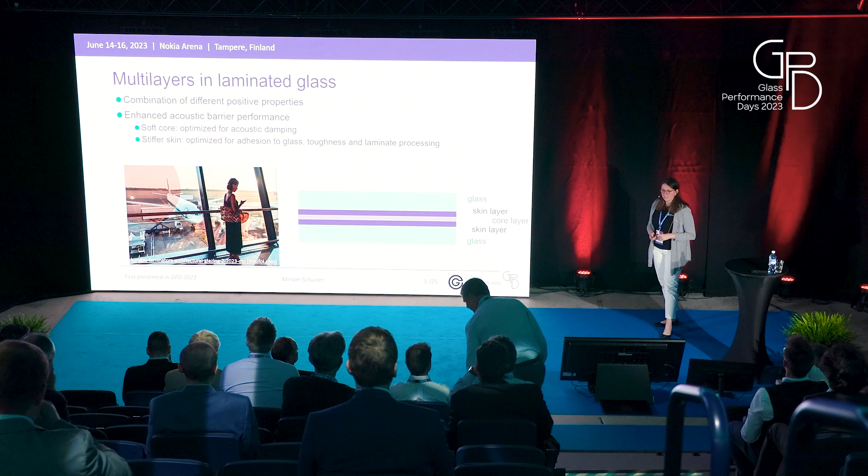So why do we use multilayers? By using different layers or materials as interlayers, we can combine different positive properties. One example in laminated glass in the architectural context is acoustic barrier performance. To have good acoustic performance, we need high damping, which is achieved with very soft interlayers. However, soft interlayers are more complicated to process, so stiffer layers are put around the softer core layer to enhance laminate processing. In total we have a three-layer, shown in this scheme: two skin layers and a core layer in the middle. Now the big question is, can the material behavior of this three-layer be predicted from the material behavior of the individual layers?

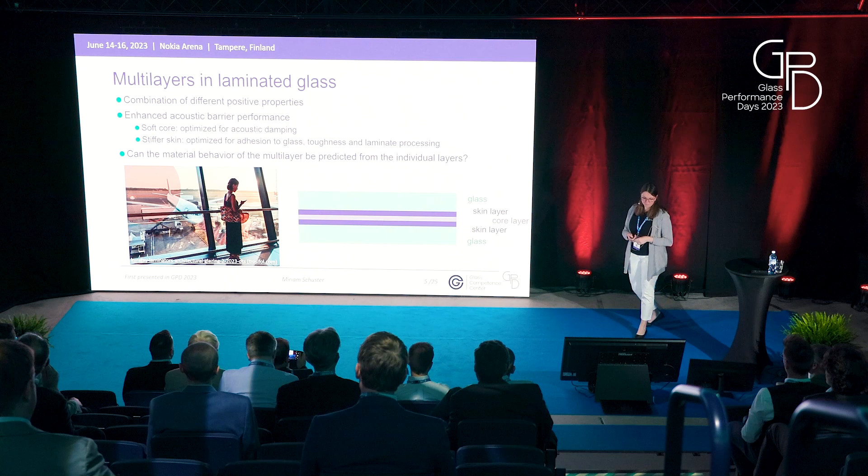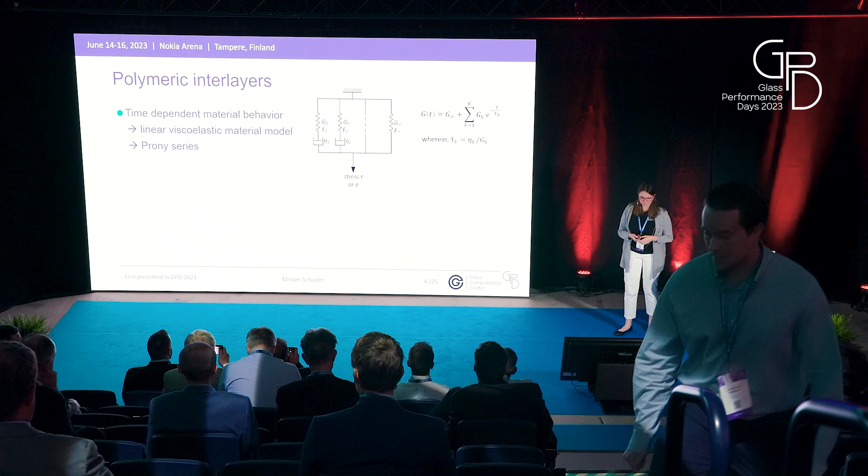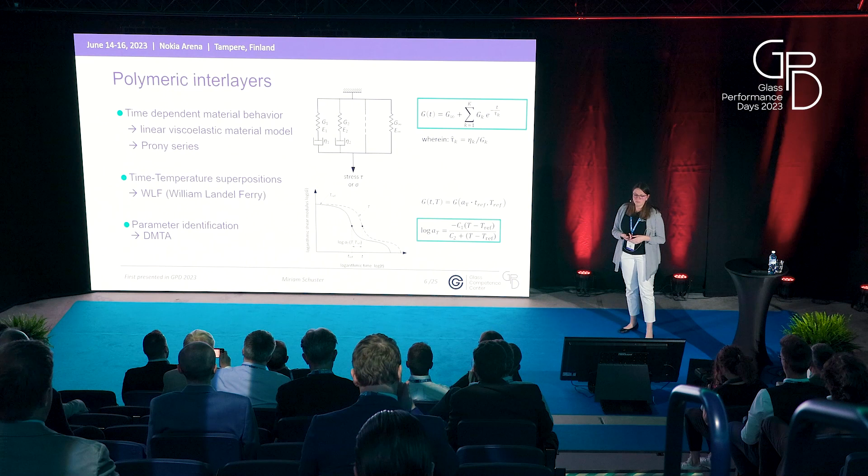But first, let's look at the material behavior of polymers in general. There is a time-dependent material behavior which can be described in the linear viscoelastic way by a generalized Maxwell model, mathematically described by a Prony series. Thermorheologically simple materials also have the advantage that the temperature dependency, which occurs in all polymeric interlayers, can be described with a shift factor - meaning that when we change temperature, the relaxation function is shifted along the time axis. Those temperature-dependent shift factors can also be described with models, one of the most common being the WLF model, shown here. Now, to find the material parameters - the Prony parameters and the time-temperature superposition principle - we need to do some tests.

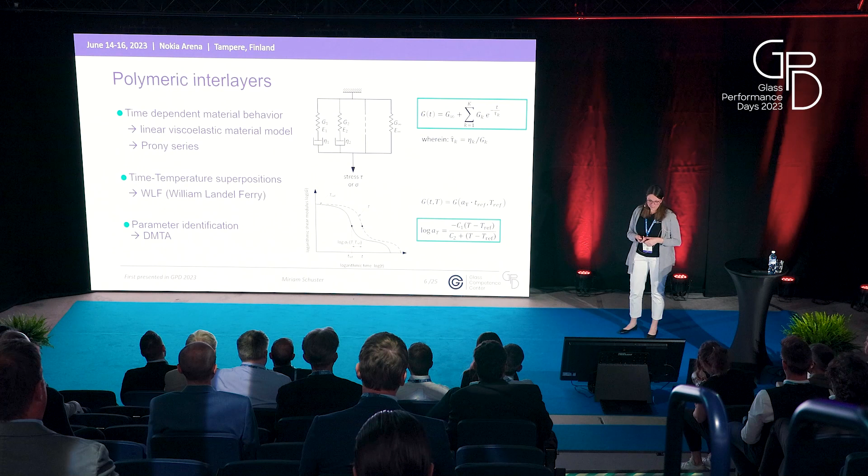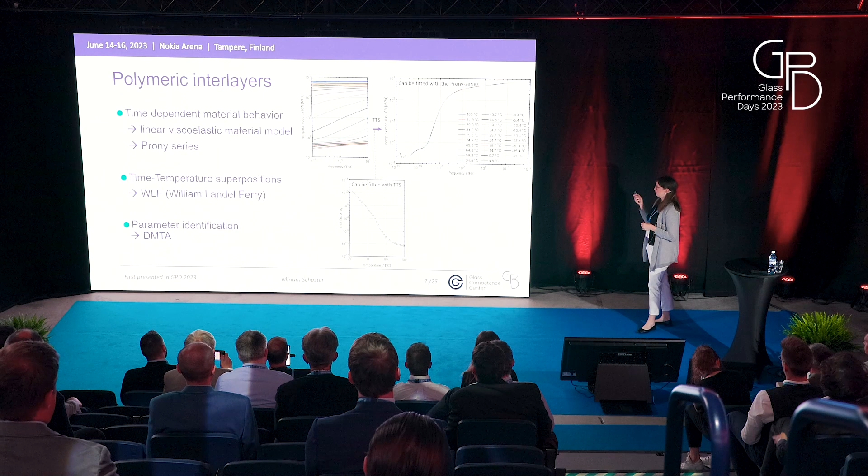The most common tests to identify those parameters are dynamic mechanical thermal analysis, or DMTA tests. The result of such tests is a bunch of curves - here we see shear modulus values depending on frequency, and each line is one curve at a specific temperature. With these curves, we can generate a master curve by shifting them purely horizontally, valid for a certain reference temperature. The shift factors needed to generate these master curves are depicted in the graph on the bottom. Now we can fit the Prony parameters to this master curve, and use the shift factors to determine the parameters of our time-temperature superposition principle. When this is done, we need validation, so often four-point bending tests on laminates are performed.

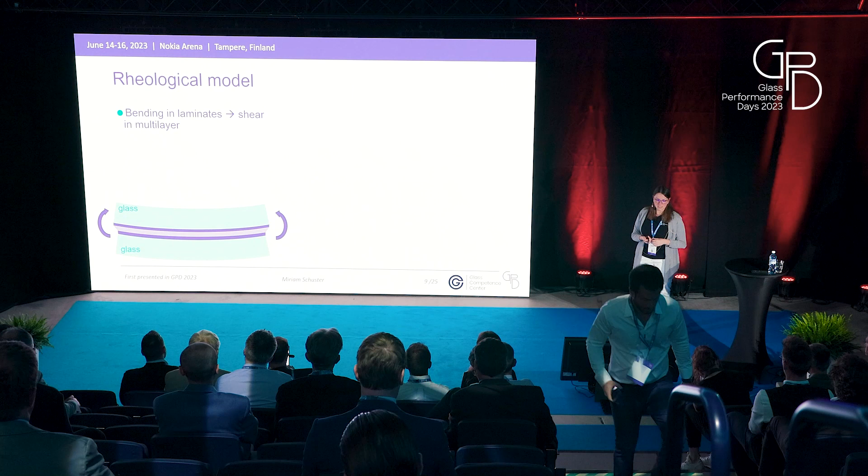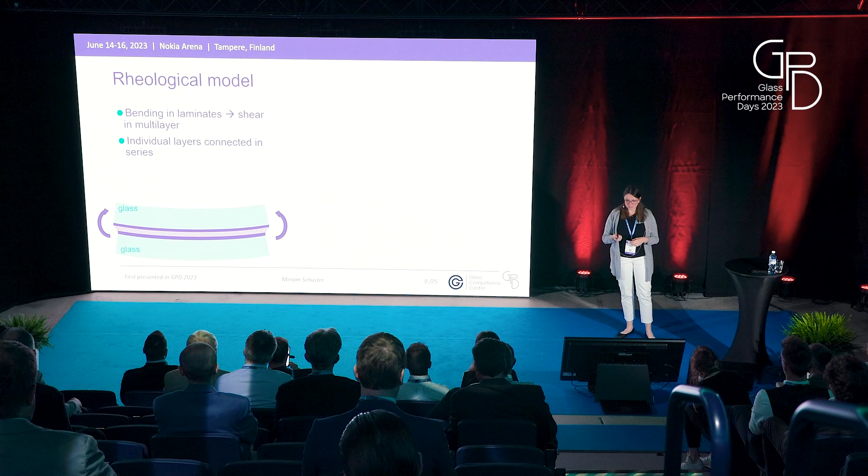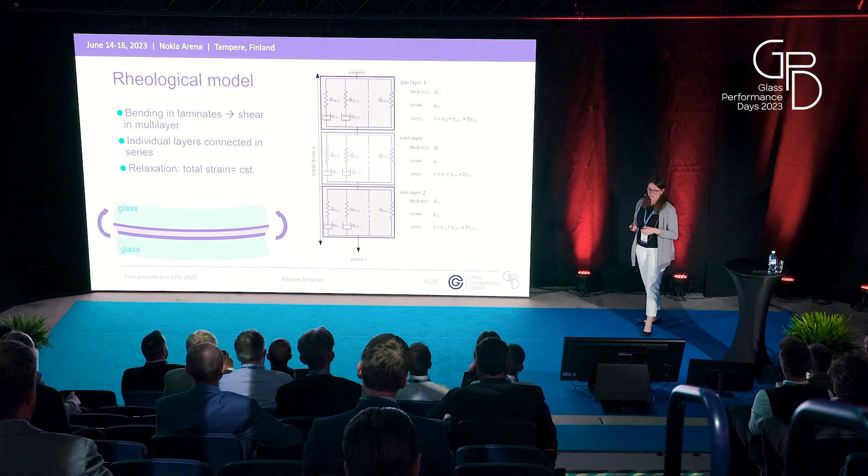Now let's look at multi-layer interlayers. Here we have a glass with a multi-layer - in this case a three-layer. When we bend this laminate, we have shear in our multi-layer, and we see that the individual layers are connected in series. To transfer this to rheological models, we have three generalized Maxwell models for the three layers connected in series. The dark color shows the skin layers, and the lighter color in the middle is the core layer. Now we want to determine the relaxation function, or material parameters, for this three-layer, so we look at a relaxation test - applying a strain and keeping it constant.

And what is of interest would be the response of the combination of those models, and this is called the effective modulus of the 3-layer.

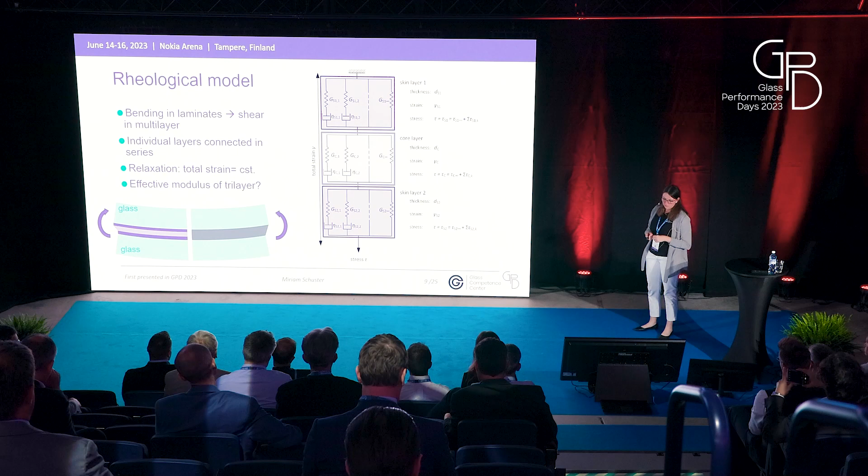So as we see, this is a connection in series, which means that we can change the order of the connection of the individual layers. And when we have identical skin layers, we could move the 3rd generalized model, which was depicted in the slide before, just to the first one and combine them, respecting a total thickness for the skin layer. So this makes it already easier for the calculation.

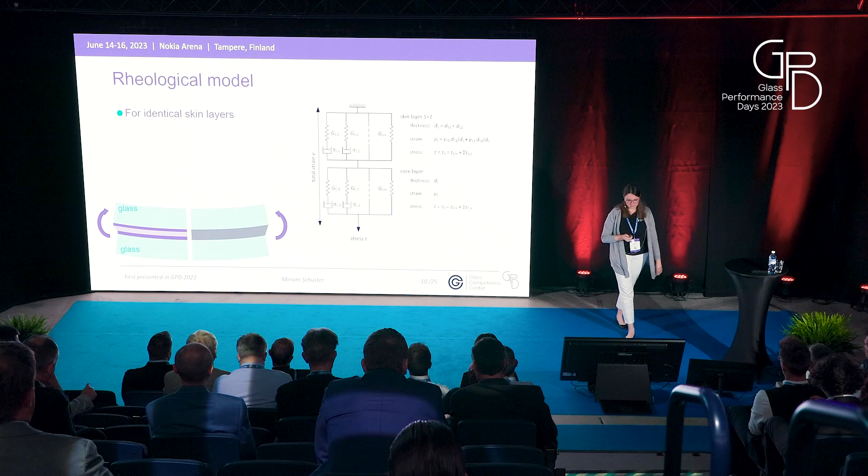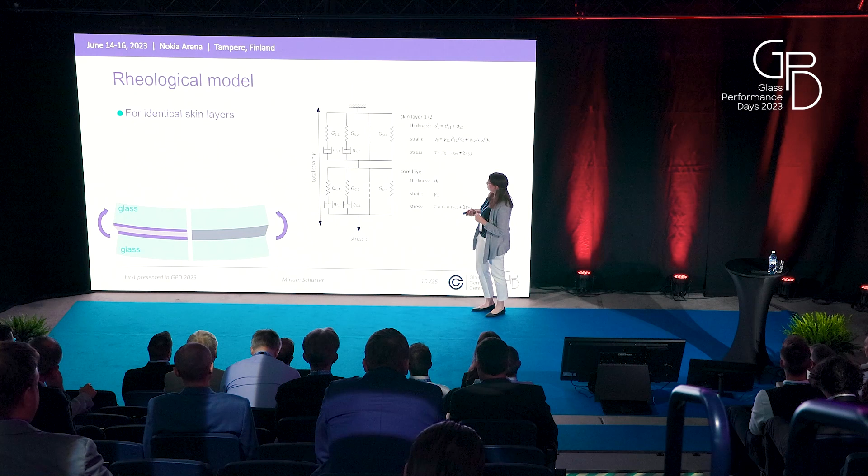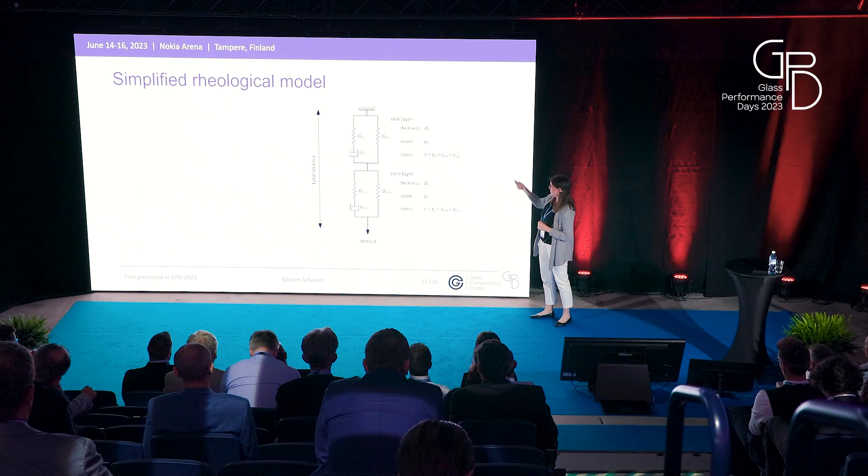In the next step, I try to do some parametric studies with simplified models, and to further simplify, I decided to firstly only consider 1 Maxwell model per layer, which then looked like this. So we have the skin layer and the core layer, but with a reduced amount of parameters.

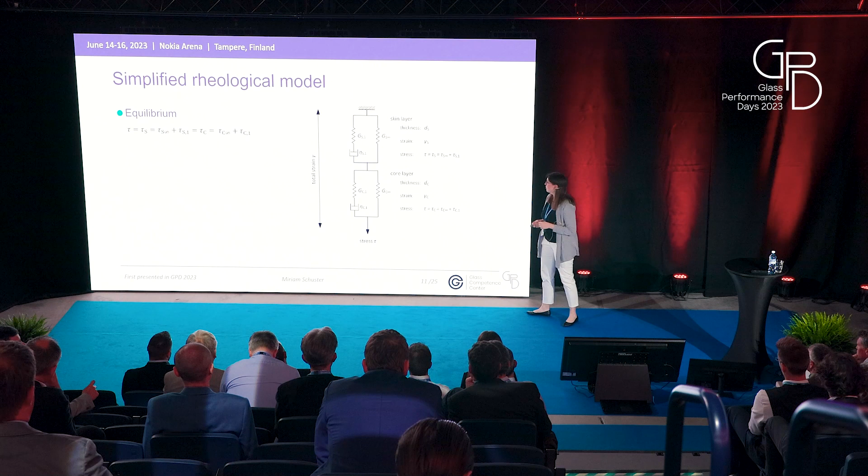And then the first thing I considered was equilibrium, which means we are looking at the stress, and we see that the stress in each of those layers is the same and consists of the sum of the stress in the elastic spring and the Maxwell element.

Second thing is the kinematics. It's a relaxation test, which means that the total strain remains constant, and hence the strain rate equals 0. And the total strain can be calculated from the strain of both interlayers.

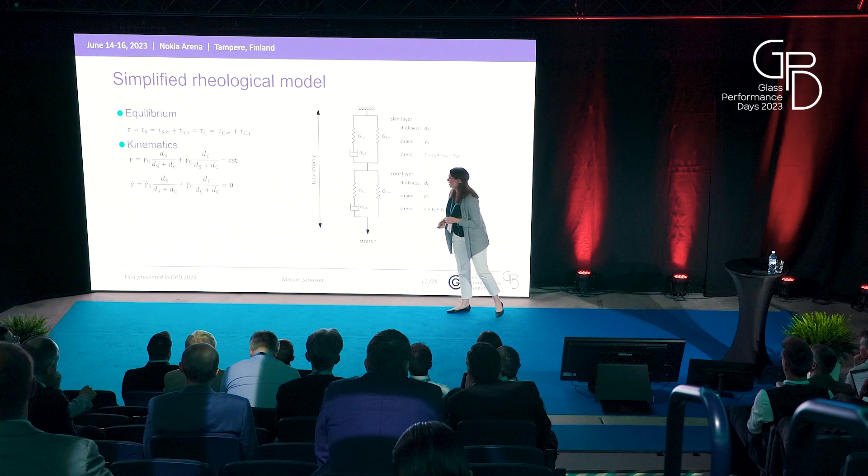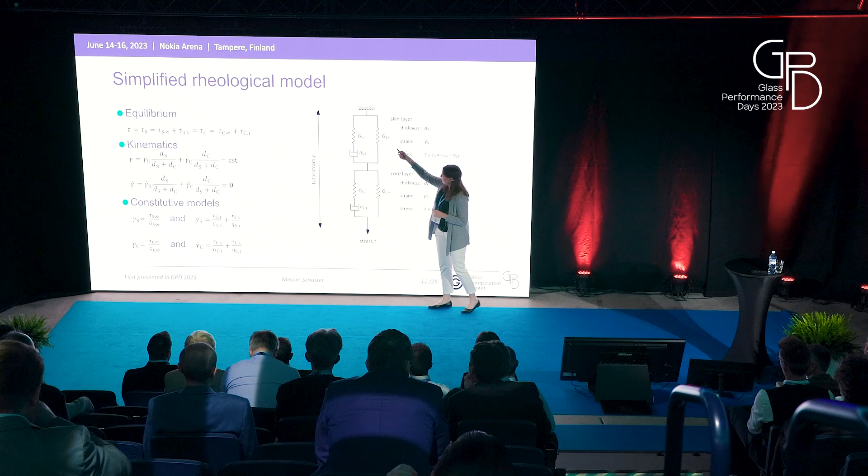And next, I consider the constitutive models for the elastic springs and for the generalized Maxwell models. And by combining all those equations, we obtain a system of differential equations. I don't want to go into detail for that, but when looking at some initial conditions, which mean the conditions at time equals 0, then we can solve this differential equation system, for example analytically or numerically.

And obtain the stress response for this multi-layer, and with the stress response and the applied strain, we can calculate the effective modulus for our multi-layer. At this point, I want to point out that even if the total strain is constant, the strain in the individual layers may change over time. And this means that the different layers influence each other, and this makes the solution of this differential equation system very long.

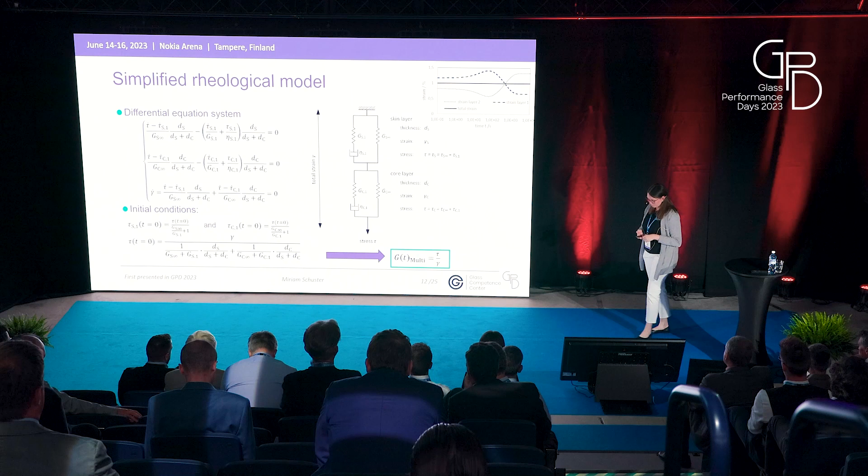So another method to come to the effective shear modulus value of a multi-layer is to consider creep instead of relaxation. And in a creep test, we have the stress which is held constant. However, we do only know our relaxation parameters for the individual layers, since the Prony parameters are relaxation parameters.

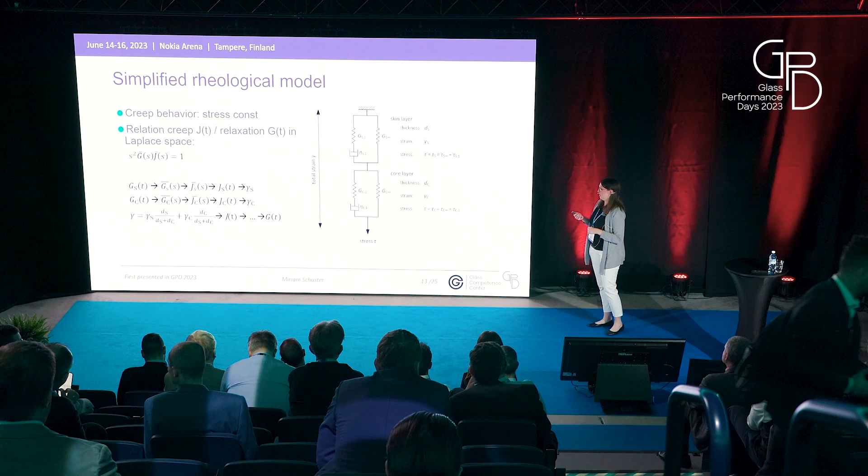But we also know that in the Laplace space, there is a simple relation between creep and relaxation, which is depicted here. So what did we do? We considered our relaxation functions for the individual layers, transferred them into the Laplace space, then used the relation between creep and relaxation, used the inverse Laplace transformation to get the creep function, and then were able to determine the creep strain for each of these layers.

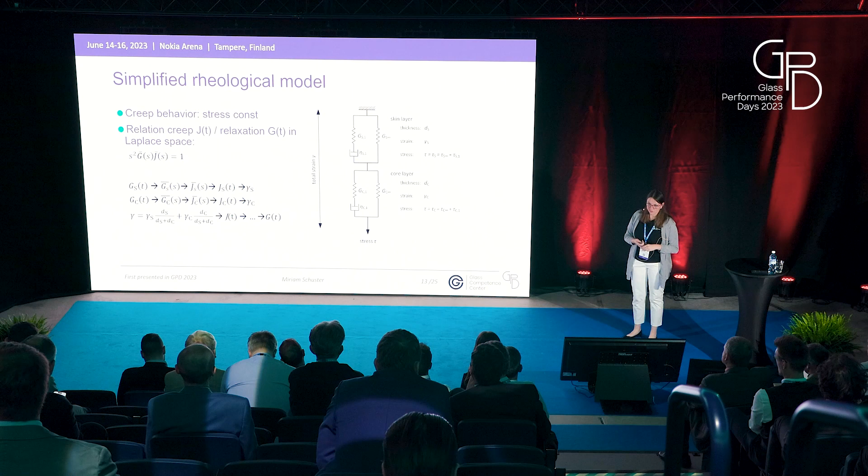And then we could calculate the total creep strain. With the total creep strain and the applied stress, we can calculate the creep function, and again, using Laplace space, we can transfer this back to the relaxation function. So this seems also very complicated at first sight, but in fact, this is a really short code in MATLAB, and it is also really fast to calculate, even if we are considering more material parameters for the individual layers.

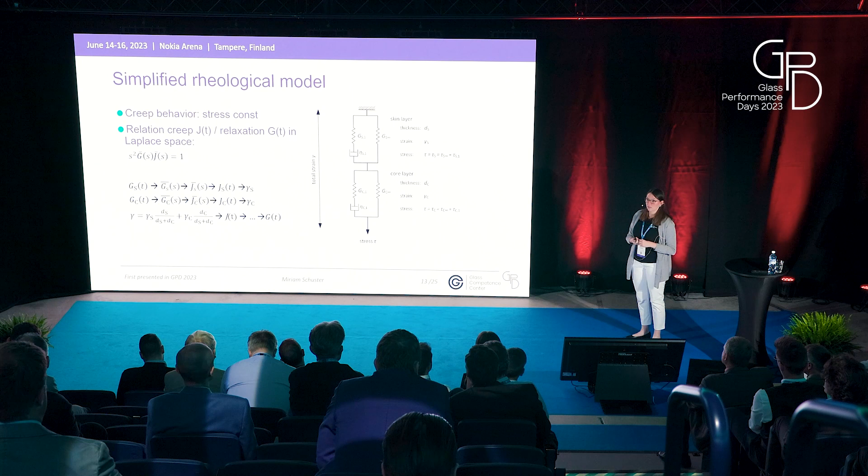However, besides those longer or more complicated combinations, we also considered a simplified rule of mixtures. In this model, the Maxwell elements of the individual layers were neglected, and only the elastic springs were considered. And the stiffness of those elastic springs are in fact dependent on time.

And we see that here the solution is very short, and of course we obtain a very quick prediction of the material behavior of the multilayer.

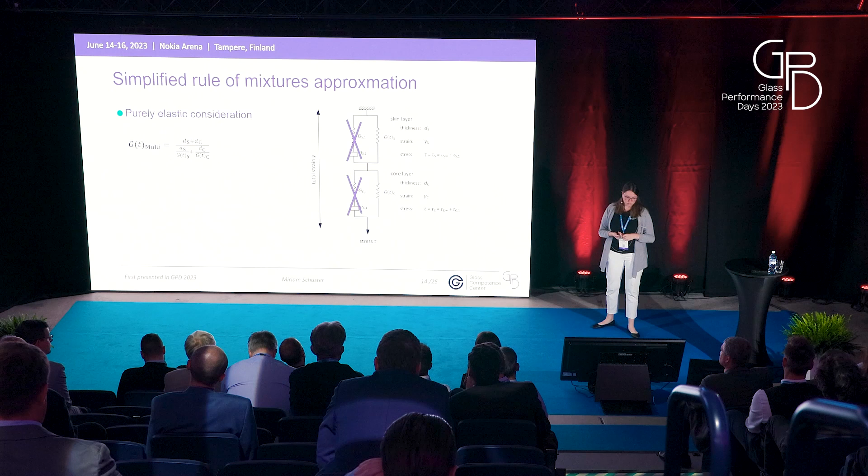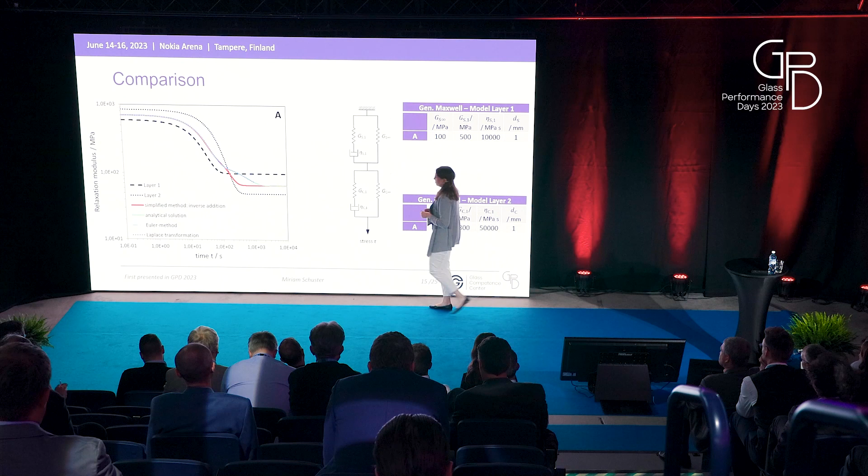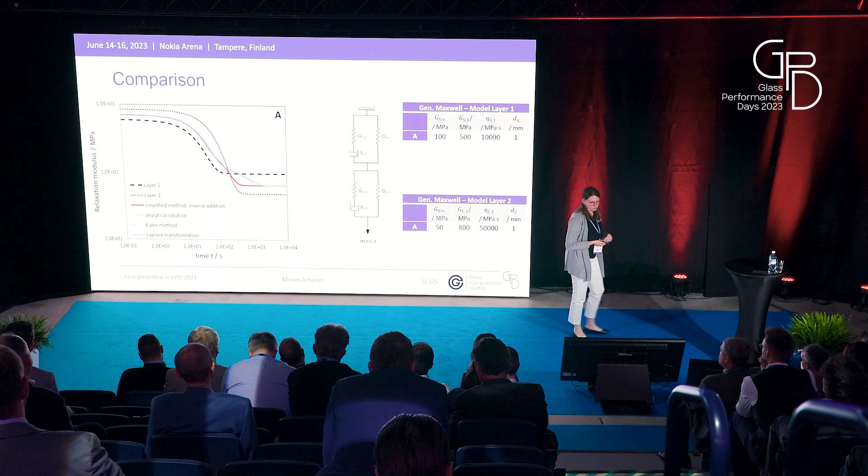And in red, we see the result from the simplified rule of mixture. And here we see that there is a deviation between the simplified and the exact solution. And this deviation is depicted in this graph in the lighter color. So we see we are around 30% of deviation in some time range.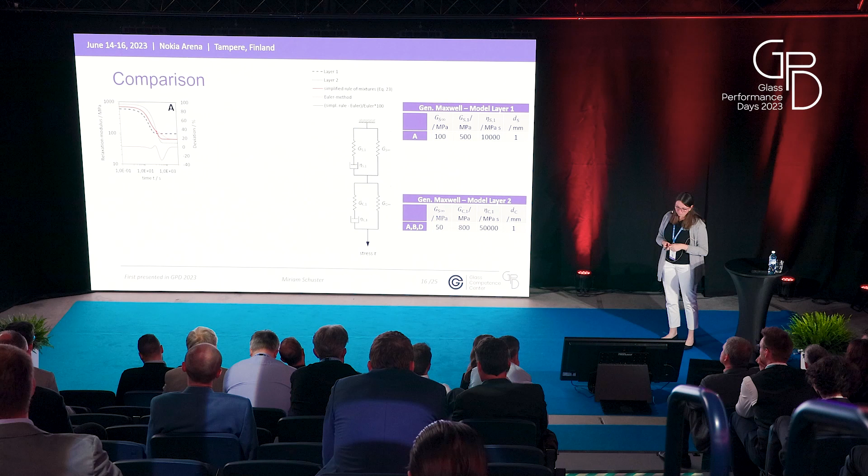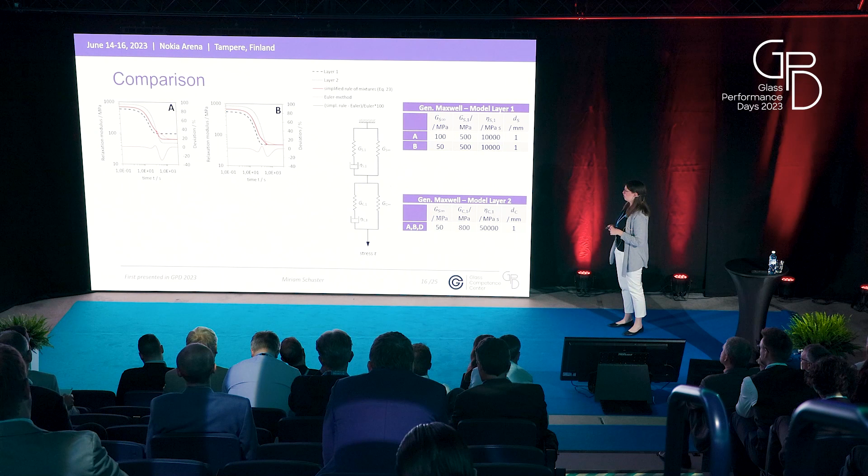And here I've also varied the parameters. For example, in this example B, we have another combination of material parameters. And here again, we see that there is a deviation between the exact and the simplified solution. But when we are looking at, again, other combinations, for example for D and E, we see that the deviation between the exact and simplified solution becomes a bit smaller. We do also see in example E that when one of both layers is very soft, then the multilayer will also behave soft. So the influence of the softer interlayer is very high.

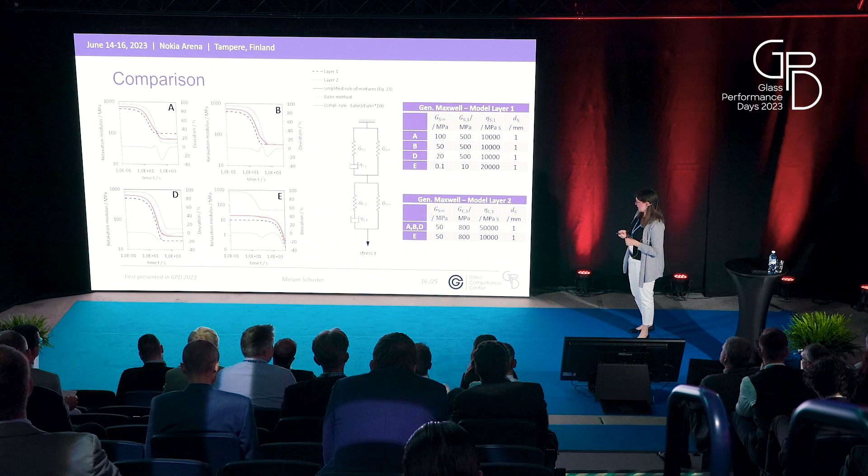Okay, let's come to the experimental investigations. First, we did some DMTA tests. We did them on a trilayer from Kuraray, Trosifol as the multilayer, and we also did tests on the individual layers. We investigated temperatures between -20 and +105 degrees Celsius, with temperature steps of 5 degrees Celsius.

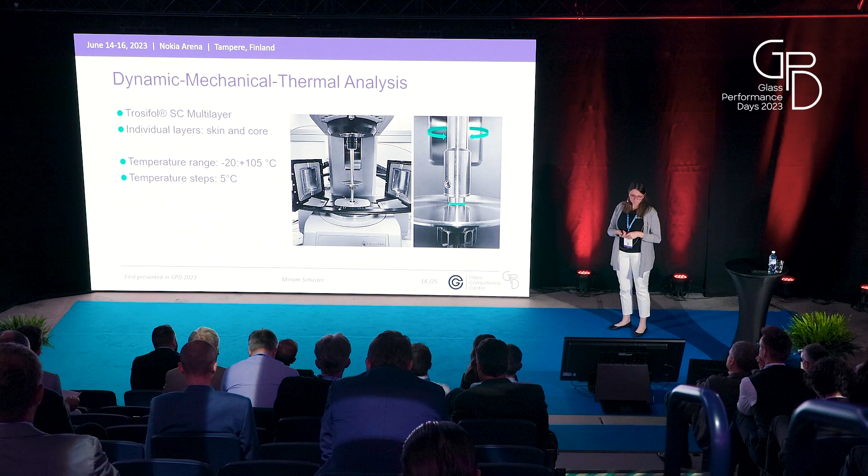Next, we had a look at the time-temperature superposition principle, or first at the shift factors, which are depicted here. The circles are for the multilayer, the square for the core, and the triangle for the skin. When looking at the triangles for the skin, we see that there's a change in curvature, and therefore we decided to look at two different temperature ranges, one above 25 degrees Celsius and one below 25 degrees Celsius. We fitted the WLF function to those two temperature ranges, and we see that in the lower temperature area we have negative constants, while in the higher temperature area we have positive constants.

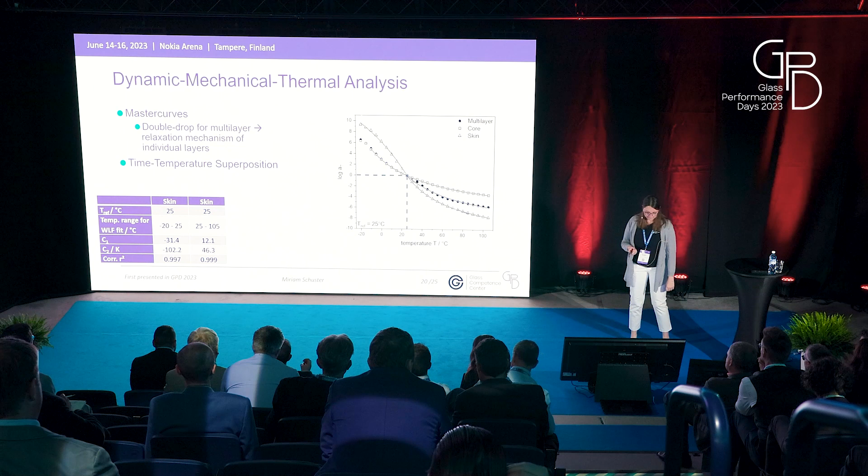We also fitted a WLF for the core layer, and for the multilayer we only fitted in the range of 25 degrees Celsius and upwards, since below, the shift factors are exactly the same as for the core interlayer.

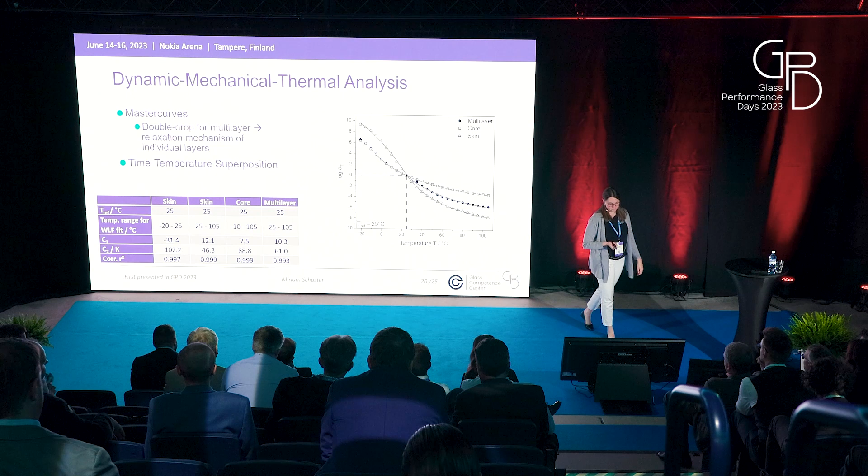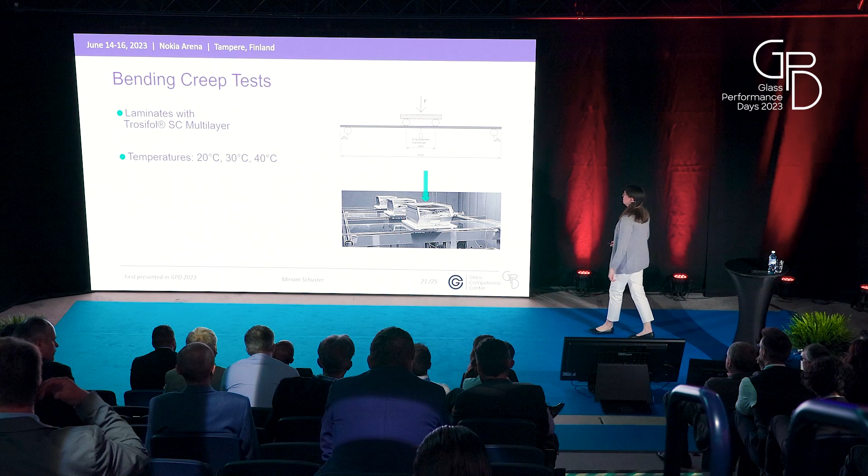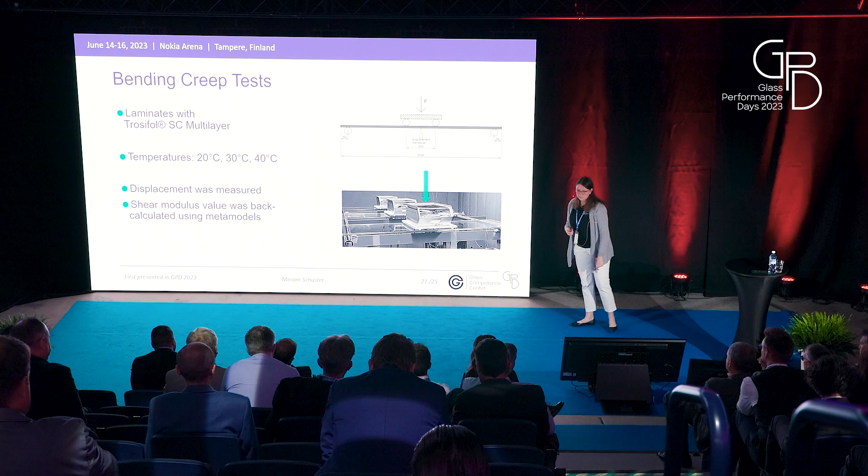Okay, then when we completed the DMTA test, creep tests were also done. They were done at the University of German Armed Forces and at Friedmann & Kirchner at different temperature levels: 20, 30, and 40 degrees Celsius. Here only the multilayer was tested, not the individual layers. A load was applied for a certain time, the displacement was measured, and from the measured displacement, the shear modulus was back calculated using some meta models.

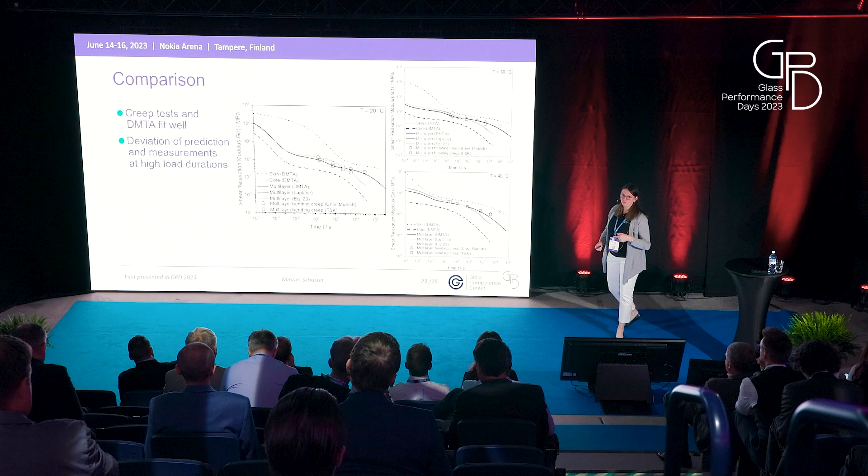We have the circles and the squares, which are the results from the creep tests, and we have the gray lines, which are the predictions. Two different predictions were used: one using the Laplace transformation, and one using the simplified rule of mixture prediction. First of all, we see that the creep test and the DMTA results fit quite well for all the temperatures.

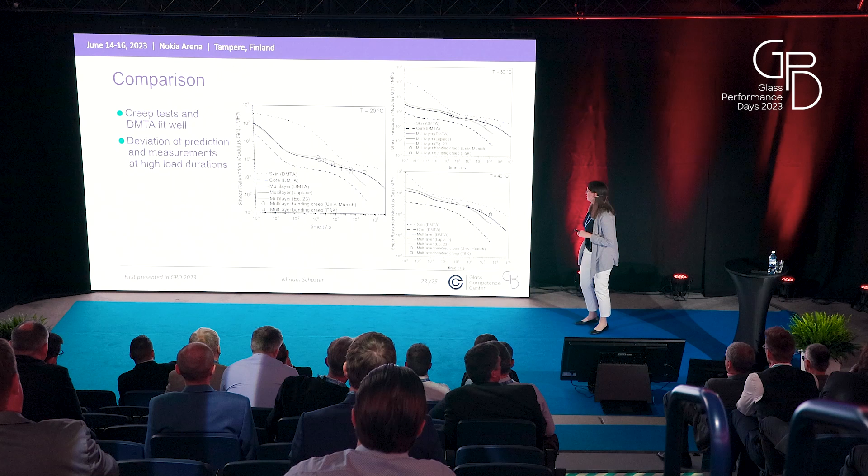However, when looking at our prediction, we see that it also fits quite well to the creep test until we arrive at higher load durations. There we have a deviation, and we still don't really know where this deviation comes from. Mathematically speaking, it comes from the decrease of the stiffness in the core layer, but why we don't observe it in the bending test is not clear yet.

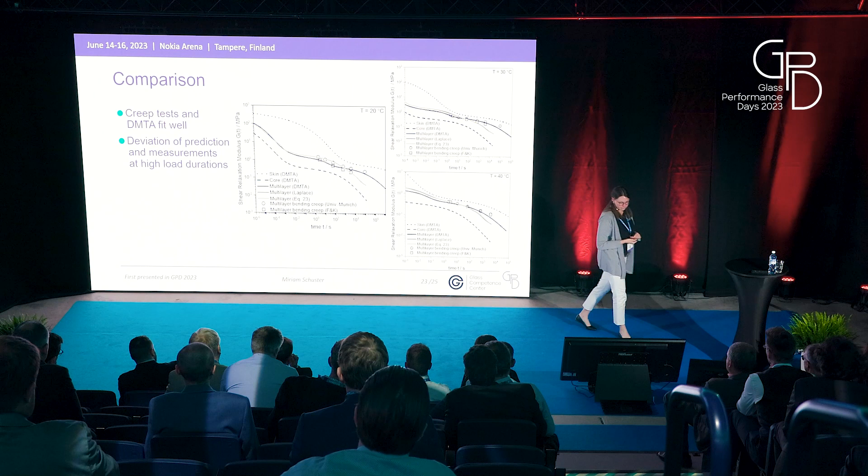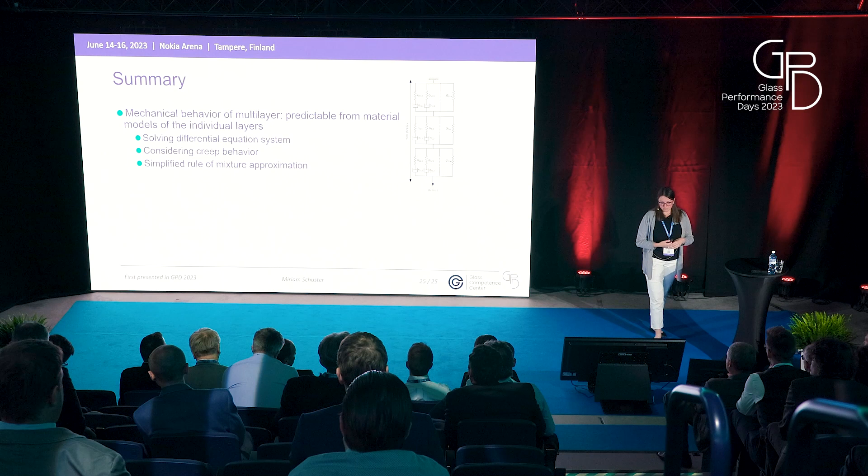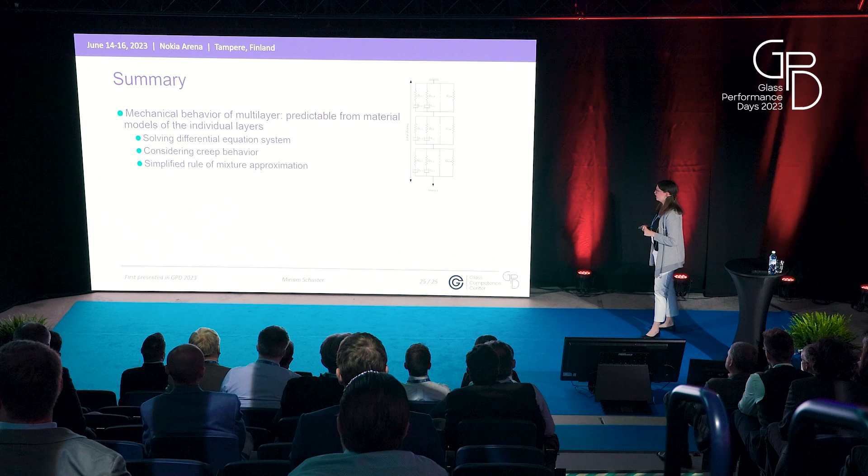So now let's come to the summary and outlook. We looked at the rheological models of three layers and were able to predict the material behavior of a multilayer from the material properties of the individual layers. We solved the differential equation system. We considered the creep behavior, and we looked at the simplified rule of mixture. I think, at least for this three-layer system, the simplified rule of mixture approximation is good enough to predict the material behavior.

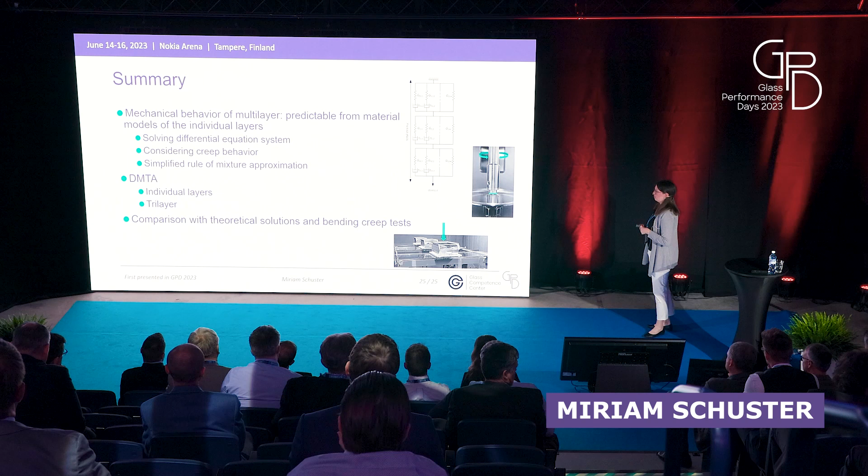We did some DMTA tests on the individual layers and also on the three-layer system, and we had a comparison with all the solutions, the DMTA and the bending creep tests. To conclude, I would say it is possible to predict the behavior of multilayer interlayers when we know the properties of the individual layers.